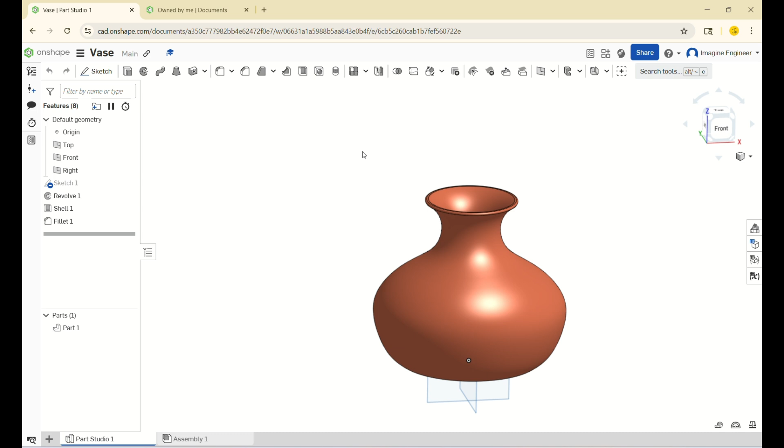So the first thing that you want to do is go to Onshape, go to Create, Document, and then you can just label this as vase.

So what I'm going to do is just create a new part studio over here. And this is what all of your guys' page should look like right now. So this is what you should be seeing.

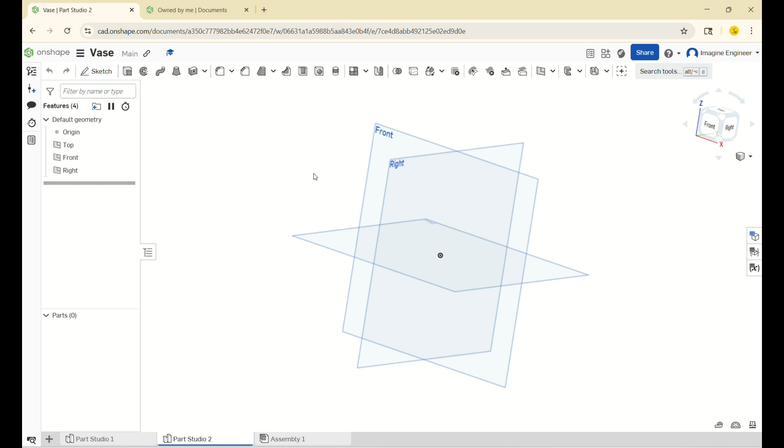So now that you're here, what I want you to do is go to Sketch and then create a sketch on the front plane.

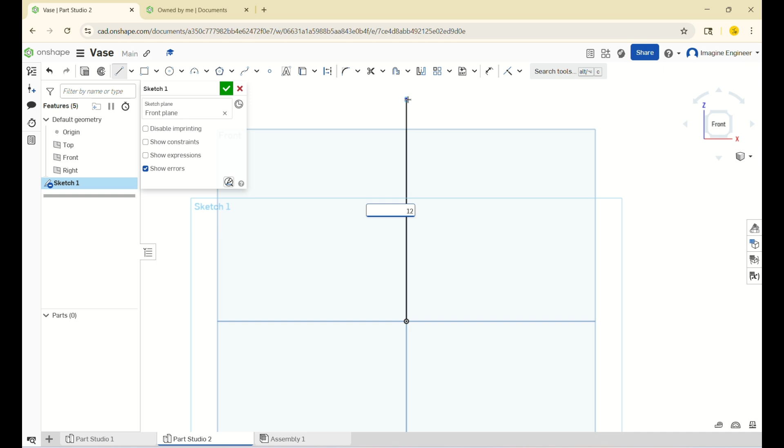Now what we're going to do is we're going to create a line that's going upwards starting from the origin, and I'm just going to make mine 12 inches. So this is going to be the height of the vase. You guys can change it to anything else you want it to be. It could be like a 7-inch vase, a 4-inch vase. That's up to you.

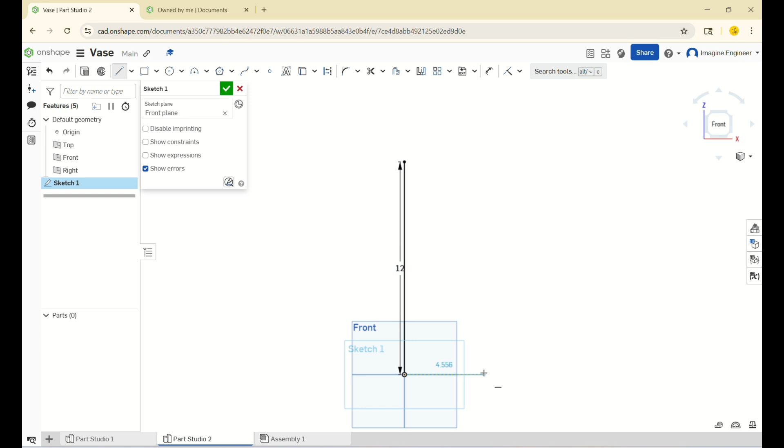I'm going to draw another line, this one going horizontal. This one also starts at the origin, and I'm going to dimension this to be 5 inches. This horizontal line that we just made, this is going to be the radius of the vase.

What we're going to be doing right now is we're drawing half of the vase, and then later on we're going to revolve it so that makes a full vase. That might not make sense at the moment, but in a couple of minutes it will.

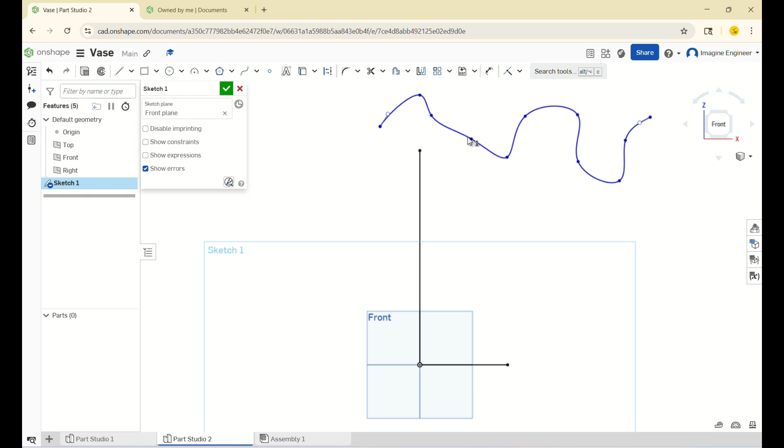So now we're going to use this tool called Spline. Basically, the way it works is that you get to create points, and then based on those points you make a path. So once you've finished making the path, you can actually even change it a bit. You see these dots, you can move them around, which makes it pretty convenient for what we're about to do. So head over to Spline and then have the first point be this one right over here.

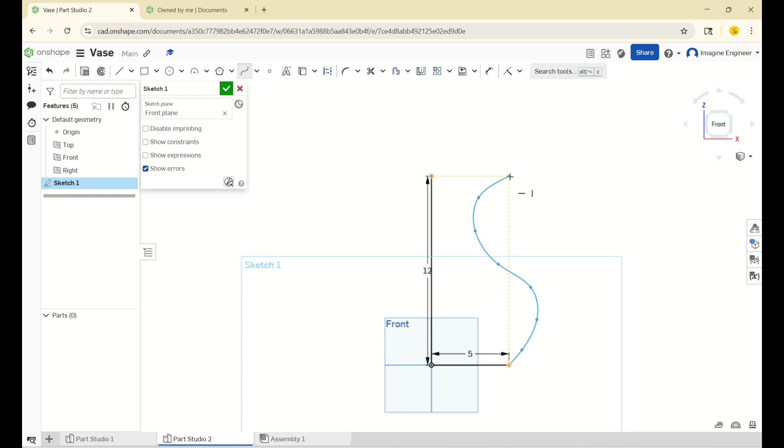You can select that, and then you can make sort of like an S-shaped line. The goal is to end right about over here, so right near the 12-inch mark. So over here, these yellow dots are basically telling me that I'm in line with the 12 inches. But it's okay if I accidentally go a bit over, because there's actually this constraint that we can use.

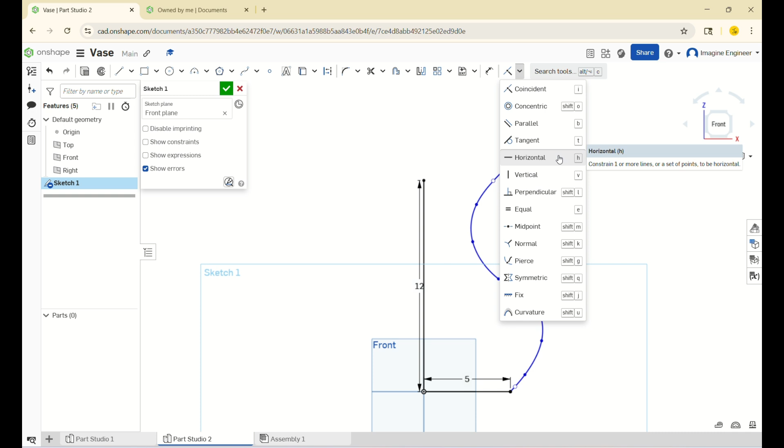The way that you get out of Spline is by clicking Escape. Anyway, so since my S-shaped line goes over 12 inches, what I'm going to do is use this tool right over here called Horizontal, and the keyboard shortcut for this is H. So I'm going to select this point over here, and I'm going to select this point over here, and look at how it moves. So now it's completely in line.

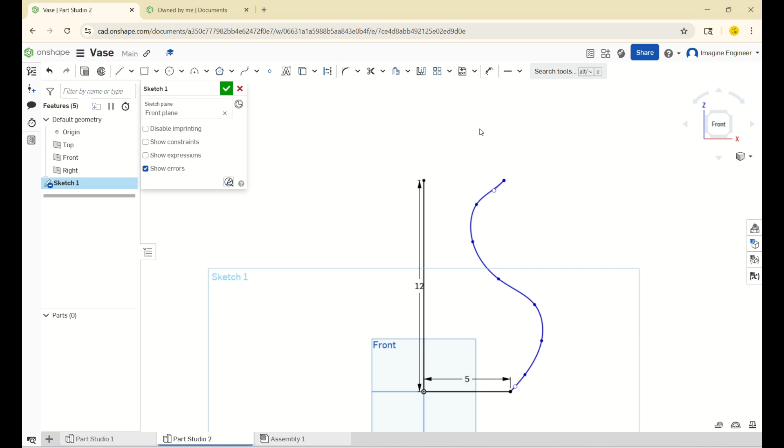As you can see, my cursor is a plus shape right now, and this is gray, which means that this tool is still selected, so I can click Escape, and now my cursor is back to normal, so now I can use other tools.

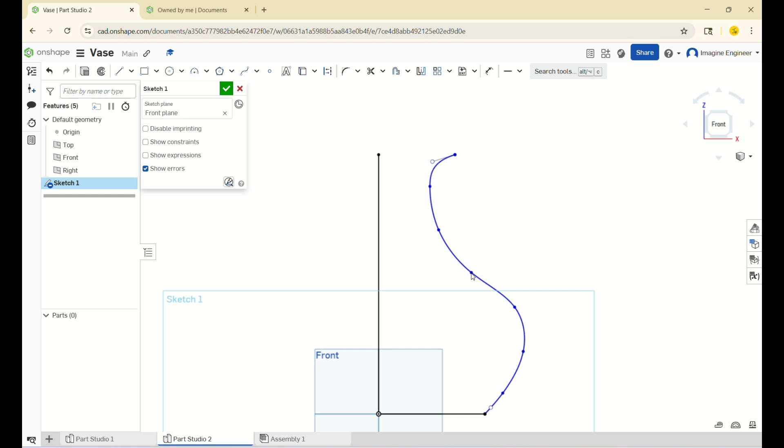Anyway, I don't really like how my vase is looking right now, so I think I'm going to change it a bit. Remember, you can do this by altering the placement of the points, and so yeah, I think this looks quite good, or it looks good enough.

Okay, so now what I'm going to do is I'm going to create a line. Keyboard shortcut is L, and I'm going to draw a line from this point over here to this point over here. So now if you look at it, it looks like half of a vase.

Now what I'm going to do is I'm going to use this tool over here, Revolve.

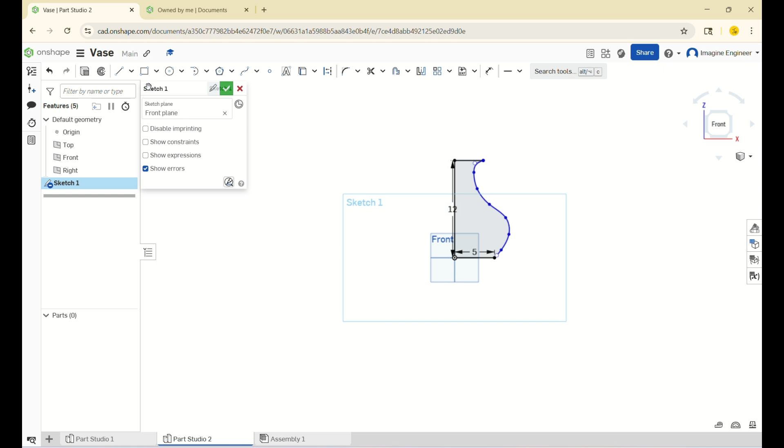So you can click it right from the sketch, or if you guys have already clicked the check mark, the tool is right over here. So the first thing that you want to do is you want to select the face or the sketch region to revolve. So it's going to be this part over here, so this gray area.

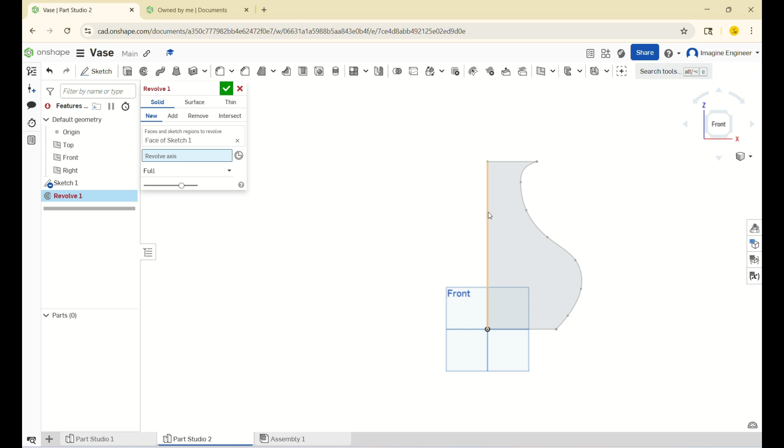Now I need to select the revolve axis. So originally this was what I was clicking, and you see how this is selected, so now I'm going to change it to this, and I'm going to click this line right over here. So this is the line of symmetry essentially. And look, so now we've got this solid vase-like shape.

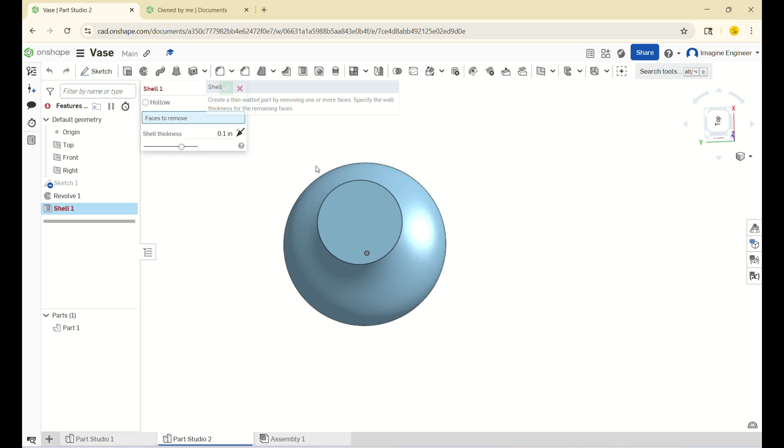However, there's a problem. You can't really put flowers in here if it's completely solid, right? So what we need to do is we need to make this vase hollow. So we're going to do that by using this tool right over here called shell. So click shell. Remember, you know what the tools are by just hovering above them, and that lets you know what it is. Anyway, so I'm going to select shell, and I'm going to click this right over here.

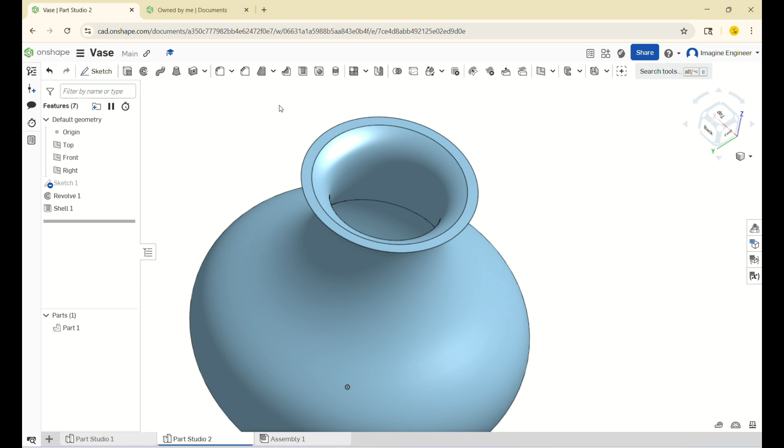And now there's a hole. Let's say I want to make this part over here just a bit bigger. Let me increase the thickness. I can do that by just doing 0.15. So now it's a bit bigger. And I think this looks good, so I'm going to click the check mark. And so now our vase has a hole.

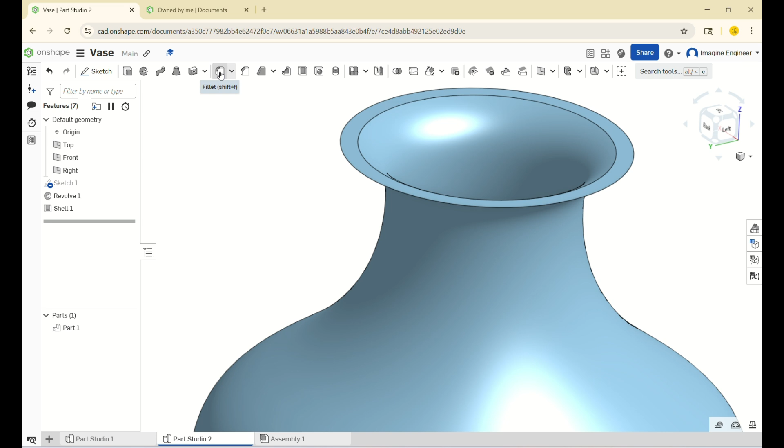Next thing I'm going to do is I'm just going to fillet the edges a bit so that it's not as sharp as what you're seeing right now. So you can do Shift F for fillet, or you can just use this tool right over here. It's the same thing. Okay, so I'm going to select this edge over here, this particularly sharp one, and I'm just going to decrease this by a bit because I don't want to fillet it that much.

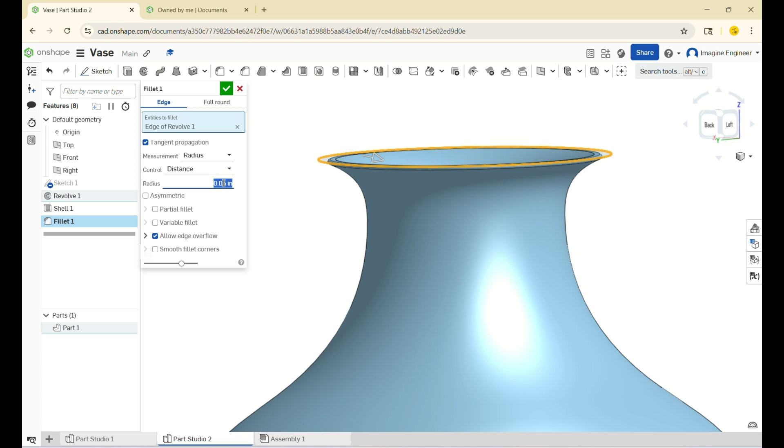Since I think this is fine, I'm just going to click the check mark, and now I have my vase. What I'm going to do next is I'm going to add color to it.

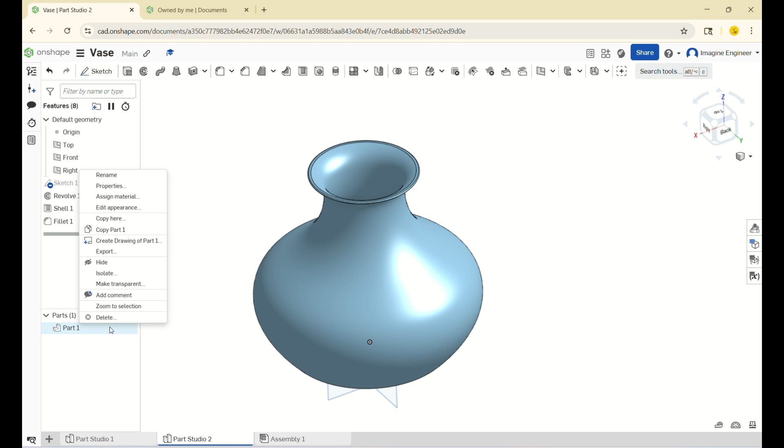So I'm on my trackpad right now, so if you guys are using your mouse, it might be a bit different. But for those of you who are on trackpad, what you can do is tap this with both of your fingers, your index and your middle finger, at the same time, and then it'll take you to this right over here. Select Edit Appearance, and so now you can make it any color that you want it to be.

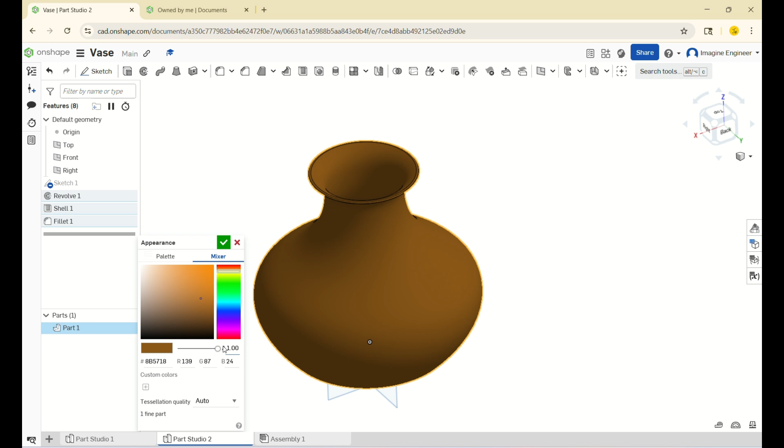If you want more color options, then you can go to Mixer right here, and then you can change how you want it to look. So you can make it more transparent, or you can just make it completely solid. Anyway, I think I'm going to make my pot be made out of clay. I think this color is suitable for that. And then you can just click the check mark once you're done.

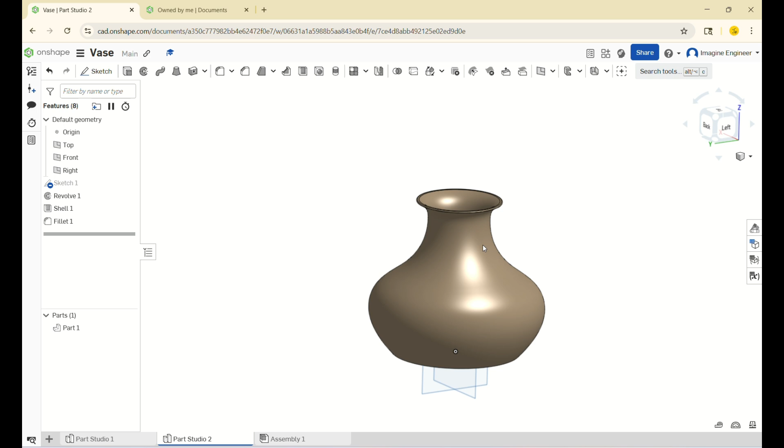And there we have it. Here is our pot. If you want to look at it without these planes and the origin, you can just hide these. And there we have it.